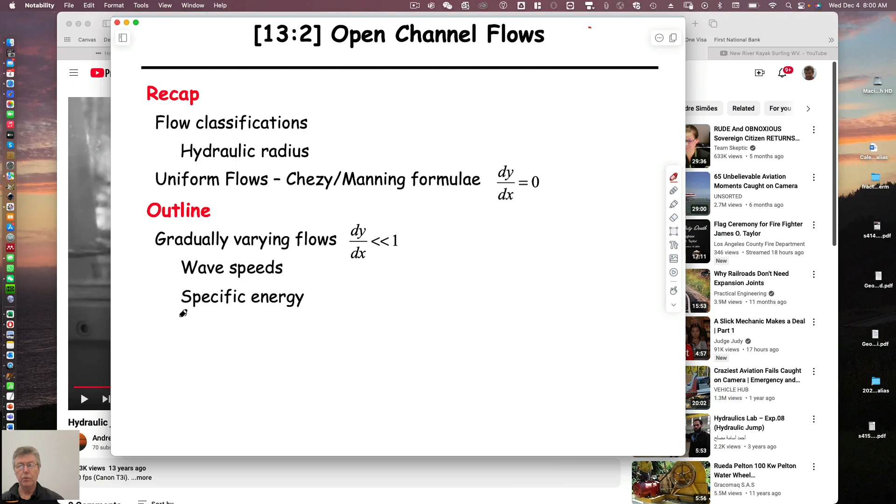All right, let's get rolling with this. We didn't quite finish off last time, right? So we were talking about uniform flows, and we were talking about the Manning formula, Chezy formula, Manning formula, where the depth doesn't change as you go downstream. We cut it short because we kind of ran out of time.

But the bottom line was, and all that you would need to know, is that we can define a volumetric flow rate or an average velocity coming out of a stream flow as a function of the slope of the bed. So the slope of the bed, if you recall, was just the height over the length. This would be the water on top of it, flowing downstream at some velocity v. And so S0 is just the gradient, the change in elevation divided by the length over which it occurs. And so gravity is driving the flow. And so this is the motive power, which is really, if you look at the energy equation, this would be the pump head.

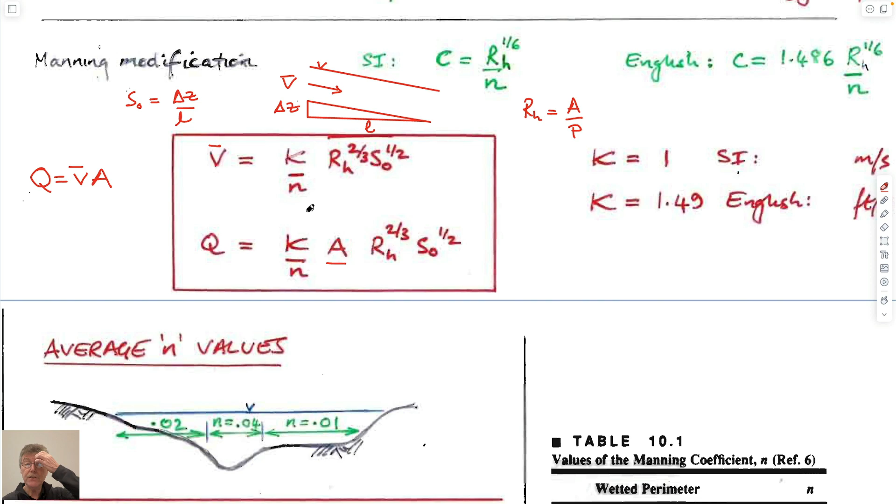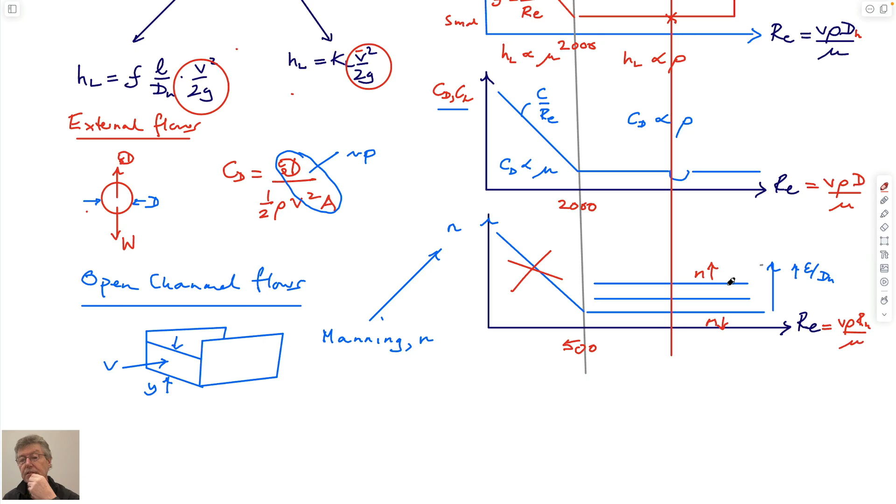This is the hydraulic radius. Hydraulic radius is equal to the area over the perimeter. And for Manning's coefficient, we rationalize the fact that it's a single value because if we look at Moody charts, we're always in this right-hand regime. So you can define a constant, which is a small number if it's smooth and a bigger number if it's a rough channel, and those numbers exist, which we'll look at in a second. And so it's just formulaic.

This coefficient depends on whether you're in SI units or English, and the units matter in this particular equation. Meters and seconds for this, or feet per second if you're in imperial or English units. Volumetric flow rate is just the average velocity times the cross-sectional area of flow.

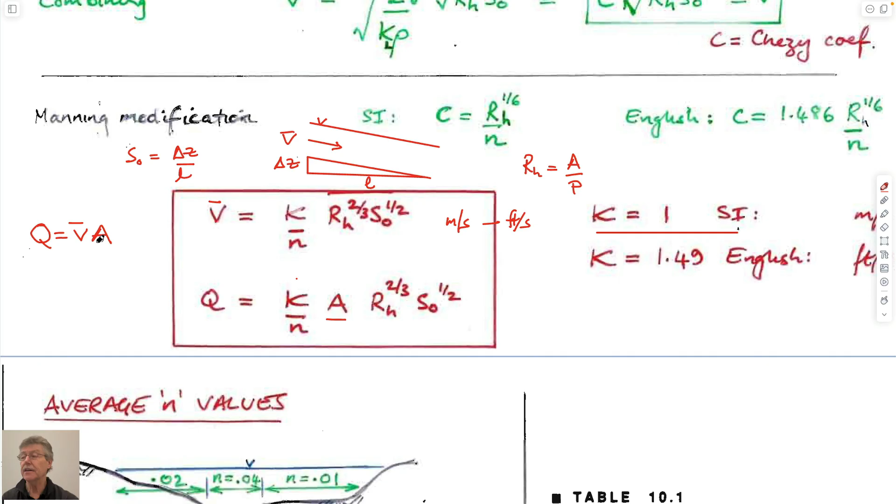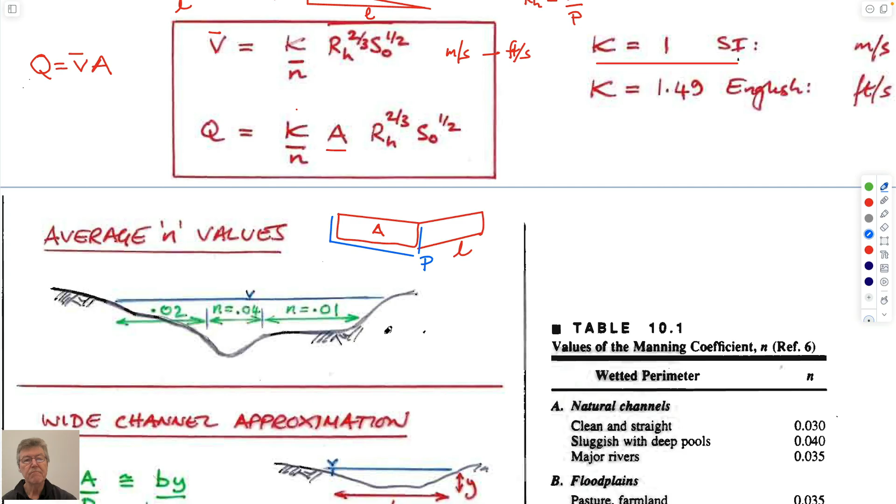And I guess we drew this in perspective so that, in terms of all our components, this is the length, this is the area, the perimeter is just this plus this plus this. And so it's easy to get this. And the slope would just be delta z, which would also be the slope of the surface as well, right? Because we said that the water slopes at the same amount. So this is just delta z, and this is also delta z.

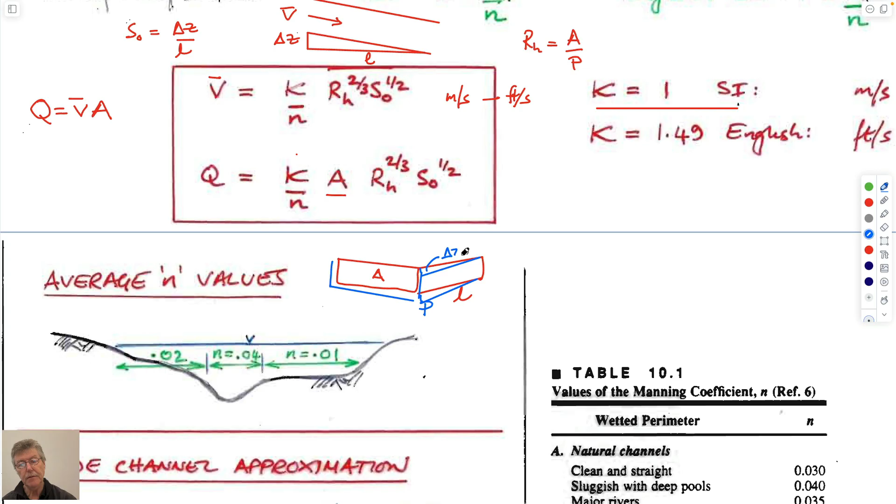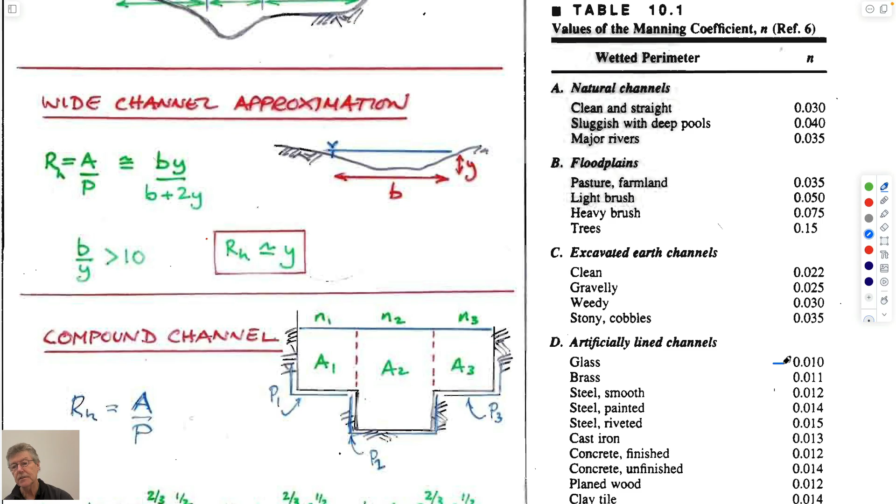And so if you have a section that you want to use, you can divide it into different parts depending on if you have a Manning coefficient, which I suppose we should talk about. They should be smaller for the smoother ones. So a glass channel, not many of those exist, I guess, but steel, if you have cast iron, or if you have a culvert, which is those corrugated steel ones, this is larger than a smooth one. So Manning's number increases as you get progressively rougher. So these are progressively rougher going down here. So this would be increasing epsilon over hydraulic radius, I guess, right? This would be increasing values of this as you go down here. Likewise for these. So you need to choose one that's appropriate for your system.

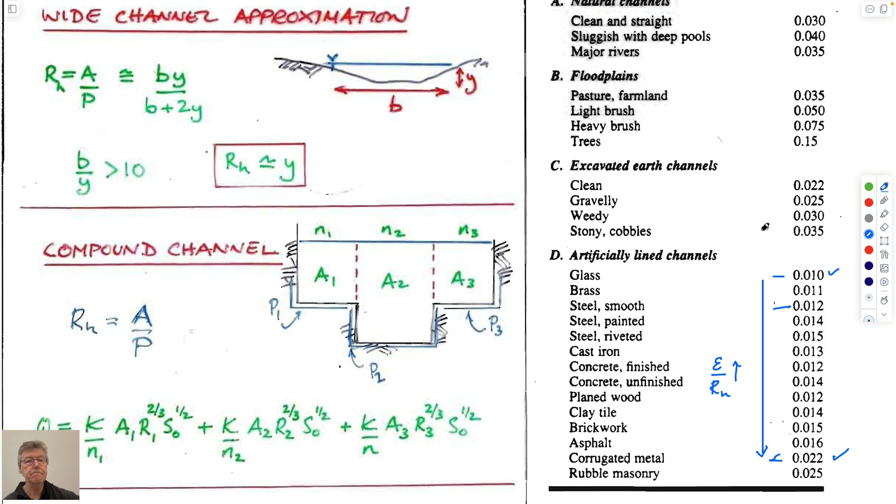You can use compound channels by having different Manning numbers. Perhaps on a floodplain you might be flowing through weeds, and this might be a real channel which is smoother. So this would be, I guess it's the opposite here, isn't it? This is larger in the middle than this. So perhaps it would be the other way around. Flowing through weeds here and flowing through a channel here, then you'd expect this Manning number to be smaller because it's smoother.

If you have a very wide channel and you define the hydraulic radius as the area, which is the width times the depth, and the perimeter would be the depth plus the width plus the depth, so b plus 2y. In the limit, if b is very wide, then this goes to just being the depth. The b's drop out on top and bottom. And so this ends up being an approximation.

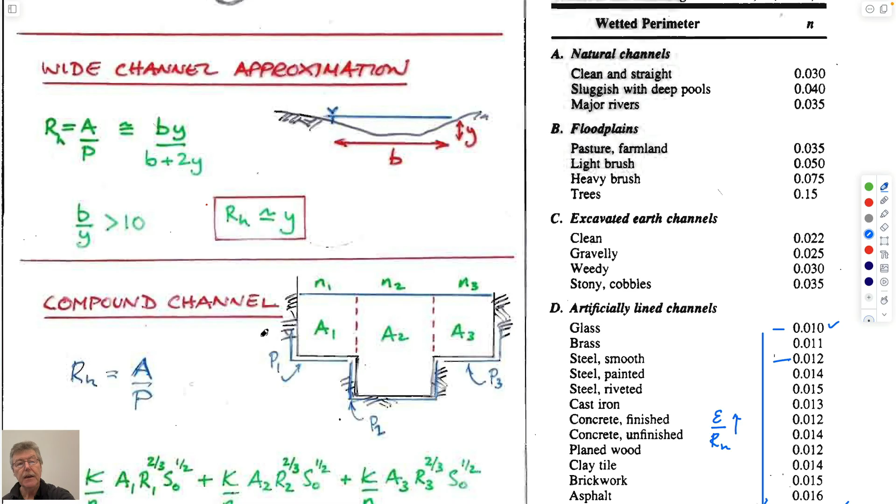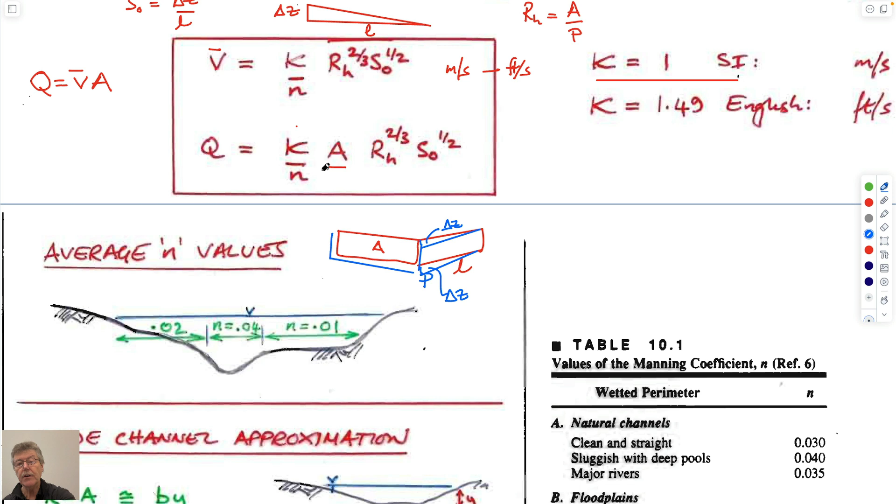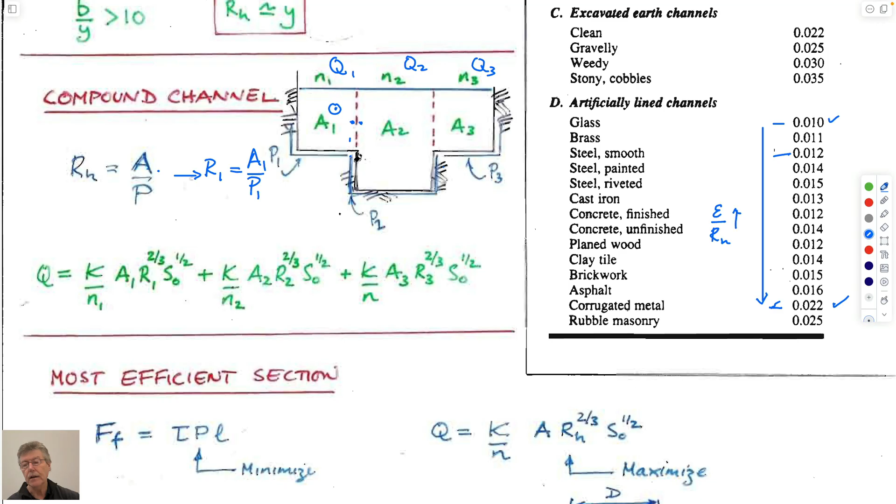And I guess the only thing to remember is that the areas of these would be the areas you see, but because you're dividing it up, the flow velocity on this side of the dashed line and this side of the dashed line is the same. So there's no drag on that boundary. And so the perimeter you use would only be for A1, it would be P1. It wouldn't include this part here. The perimeter for P2 would be this. It wouldn't include this or this. And the perimeter for P3 would be this, as opposed to the areas, which are just the areas. And so hydraulic radius 1 would just be equal to A1 over P1, where it's obviously just the wetted perimeter. So this is the wetted perimeter.

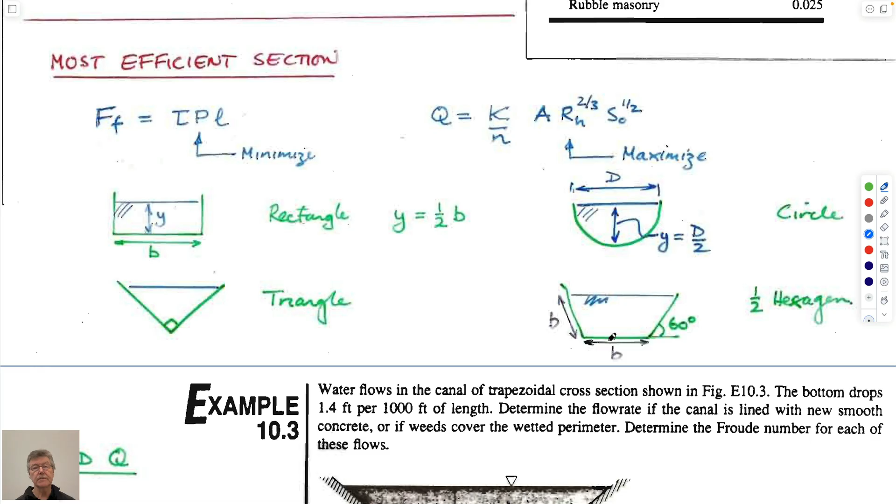And finally, I guess, there are sections that are the most efficient, that would carry the flow. And you could do that by maximizing the flow for any section. They're just standard results. The maximum flow section would be a rectangle where the depth is half the width. A triangle, which is a right angle triangle on its edge. A section of a circle which is filled to half, or a semicircle which is filled to full, or a half hexagon which has 60-degree sides and is the same length on each of the sides. Just standard results that come out. So that is that. And there's an example in here. Pretty easy to go through.

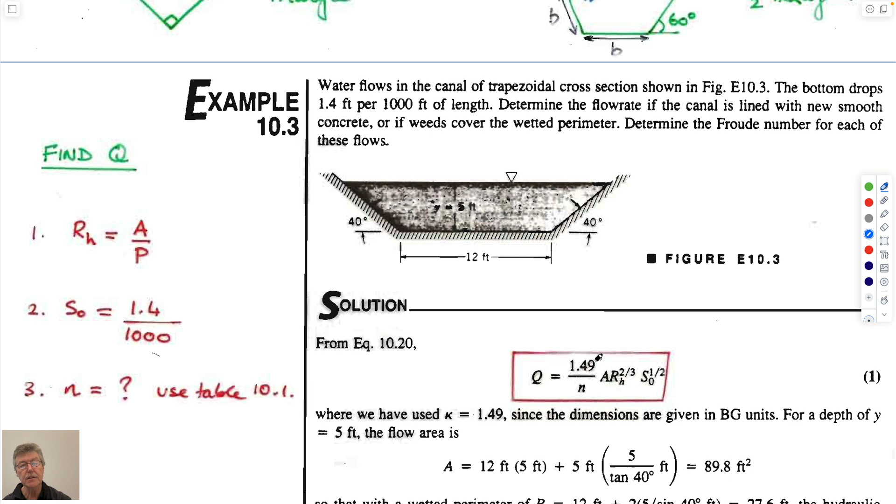Again, you just need to work out the dimensions for this, so you know the expression you need to use is this for flow rate. This is in English units, so instead of being 1, it's 1.49. A Manning coefficient, which you need for this particular lining, which is smooth concrete. Cross-sectional area, and a hydraulic radius to the power 2 over 3, and the slope of the channel. Slope is dimensionless. It's equal to 1.4 over 1,000, delta Z over the length of flow. The hydraulic radius is equal to the area over the perimeter.

I guess for this you'd need to do some work. Determine the flow rate for a lined canal. What do you know? You know 12 feet. Oh, you know a depth. So H equals 5. So I guess this is 40 degrees. This is 40 degrees. So W tan 40 equals H, which is equal to 5.

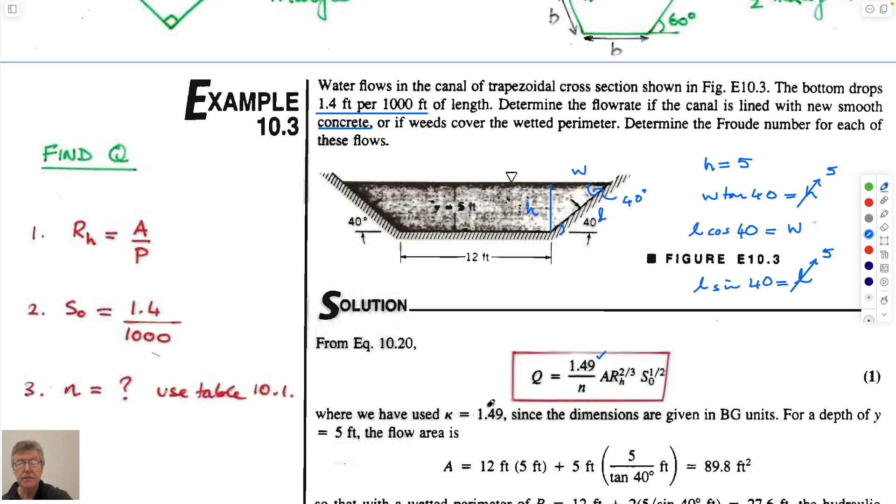You also need this for the wetted perimeter, right? So you need this length here. L cosine 40 is equal to W, and L sine 40 is equal to H. I guess you know H rather than W. And so those are the lengths you need. So the area, it's done here. The area is going to be 12 feet by 5 feet, which is this segment here.

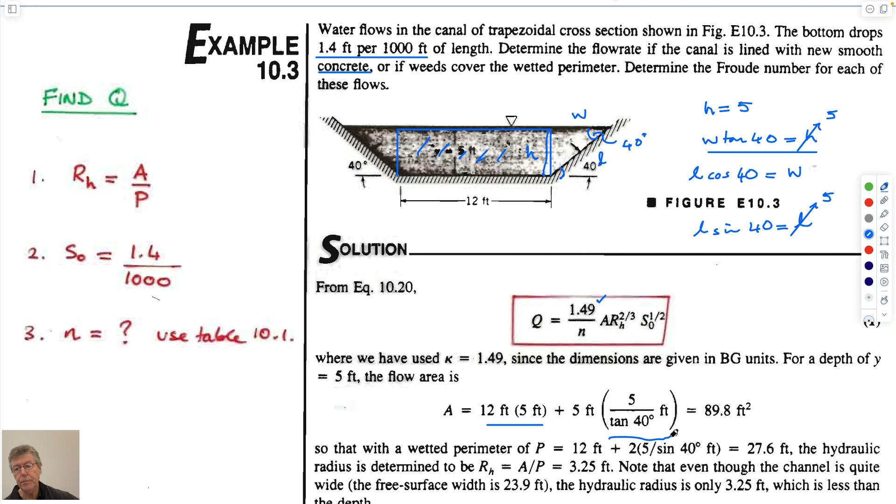And this is going to be 5 feet, height times half base. Half base is going to be the width divided by 2. The width divided by 2 is just this, rearranged. There's 2 of them, so it's half width times the height, but there's 2 of them because there's one at this end and this end, so put them together, they just end up being a rectangle. So this is the area of the other part. Add them together, you get this.

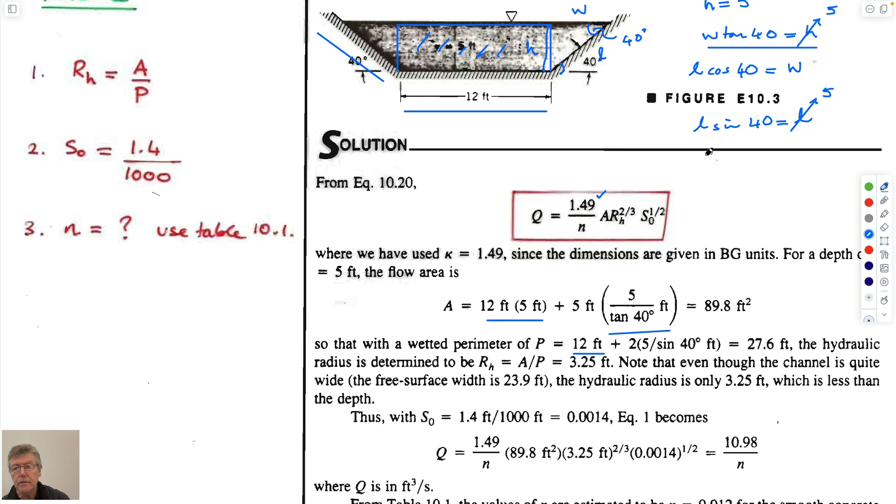The wetted perimeter, they do it, is equal to 12 feet plus what we've called L. So this is H, this is H, right? And so this is 5 over sine 40, and there's 2 of them, one at this side and one at this side. So you have the perimeter. The hydraulic radius is just the area divided by the perimeter, which is whatever it is.

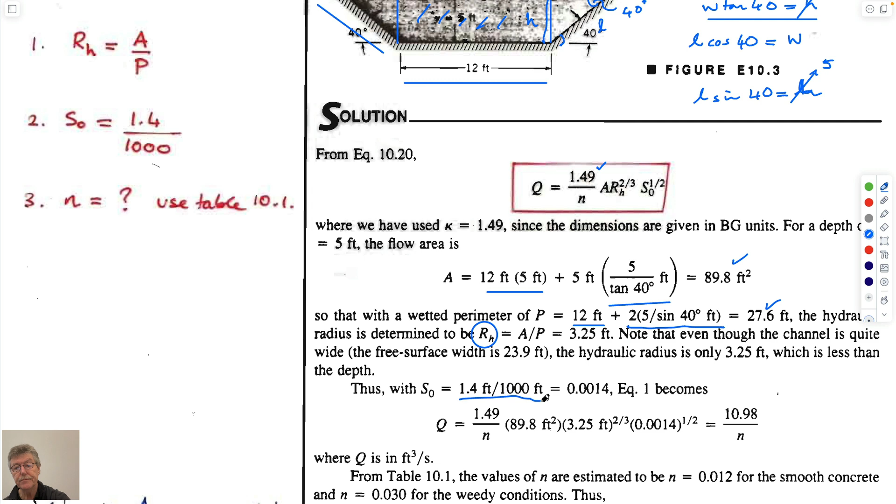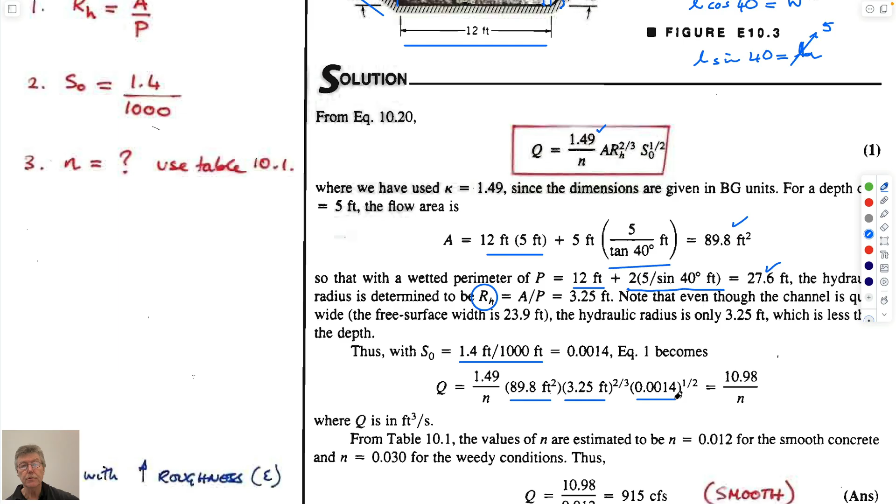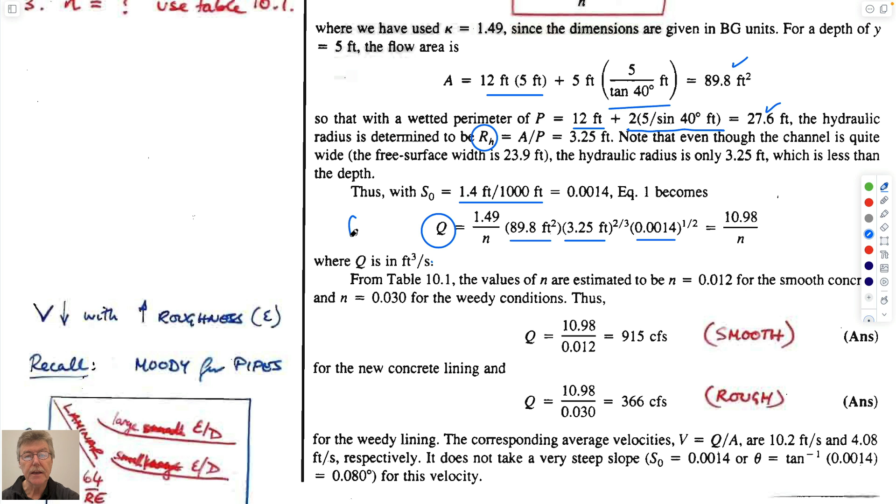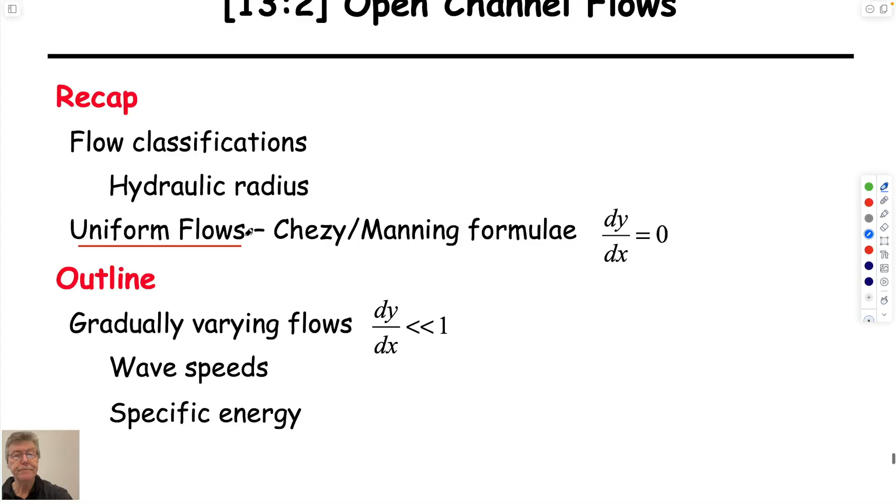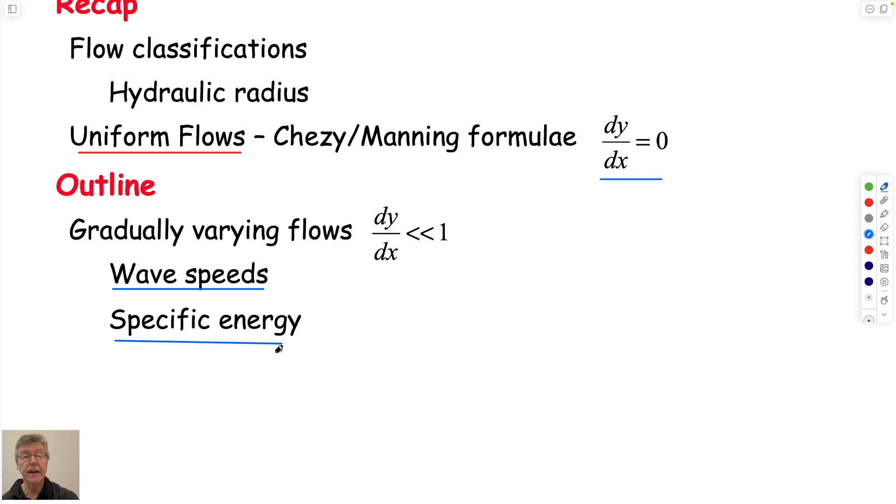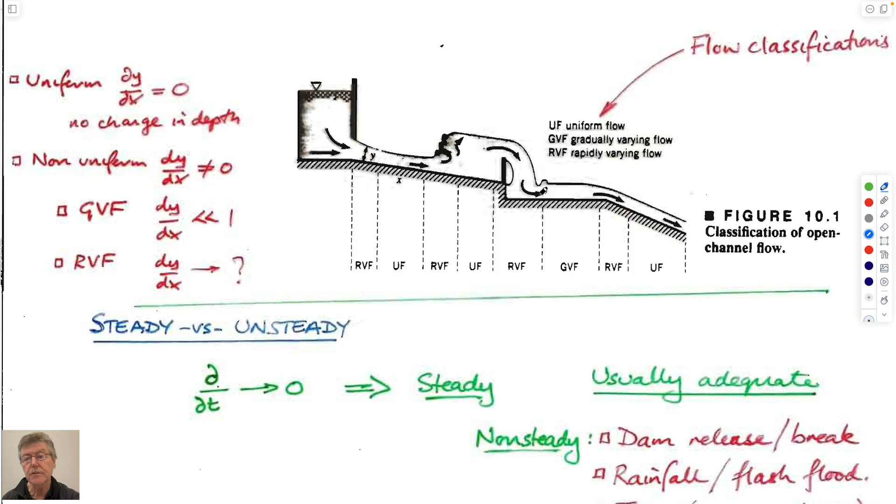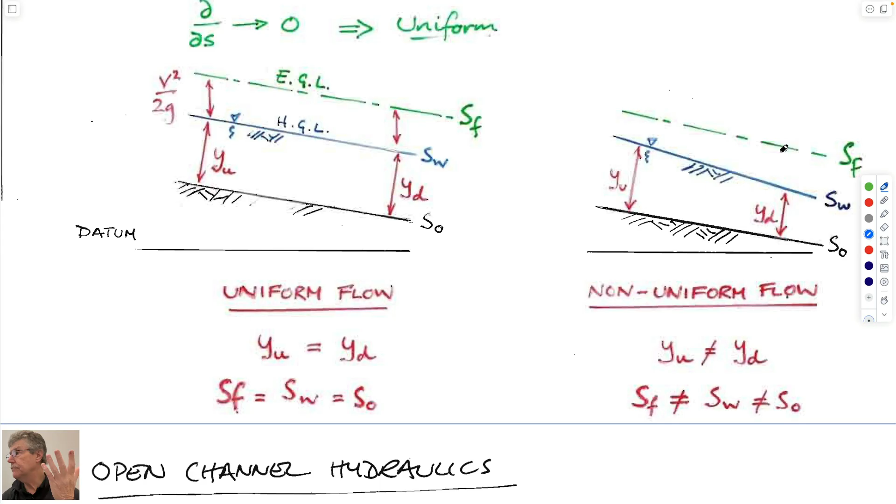So for gradually varying flows, which are when this is no longer the case, we need to talk about a couple of things. We talk about wave speeds. Perhaps we won't talk about that in great detail, and we can define things in terms of specific energy. Uniform flows are where upstream and downstream depths are the same. Gradually varying flows are where it goes from some depth upstream to some different depth downstream. And that means that instead of the hydraulic grade line being parallel to the bed, the slope S0, the slope of the water and the slope of the energy line can all be different to each other. And so we need to be able to deal with that.

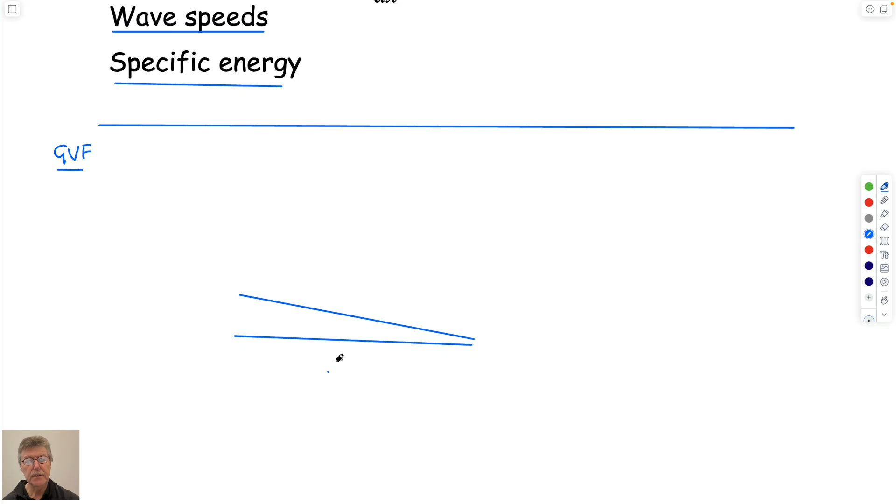So rather than going through it, perhaps I'll see if I can derive it cold. So for gradually varying flows, the geometry you have is something like this. Where this is a length, we're going to have a channel with a flow in it, and that channel is going to have something like this. And this is the horizontal. And so what we could define is a downstream and an upstream.

This should actually be tapered to there. And let's put some components on this. This is the bed. This is Bernoulli point 1. And this is Bernoulli point 2. This would be our datum.

I guess this would be Z1. This would be Z2. I didn't draw it very well, but then this would be delta Z. This would be the length between upstream and downstream. This would be our free surface.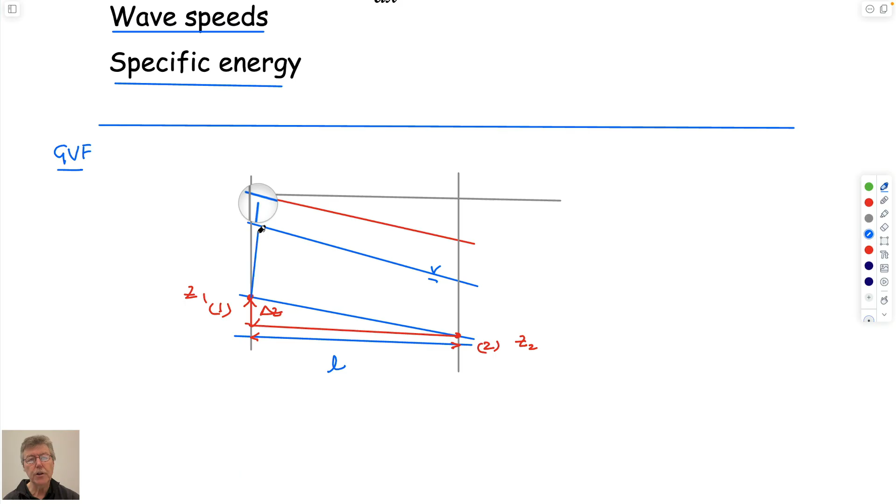If it's perpendicular to the bed, this would be Y, but it doesn't really matter whether we draw it vertically or perpendicular to the bed that's sloping, because the bed's sloping so shallowly. Let's draw it slightly askew. So this would be y1 and this would be y2. And this by definition would be v1 squared over 2g. And this would be v2 squared over 2g.

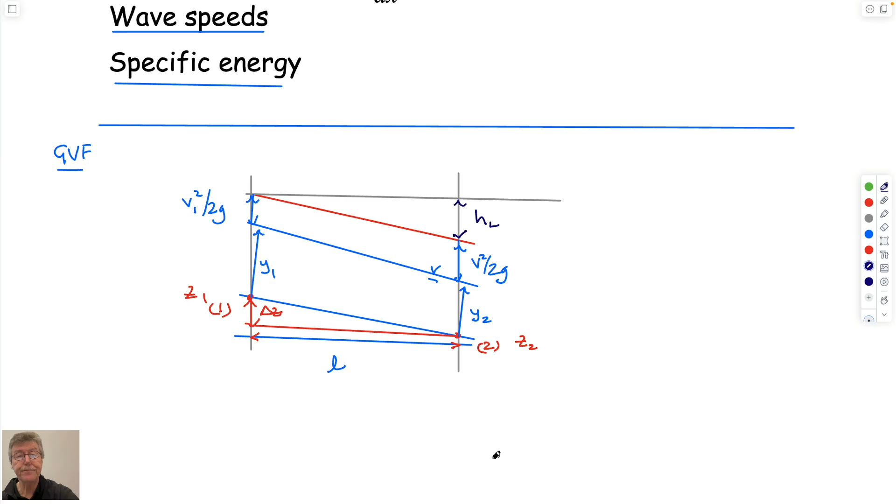And this other portion here would be called HL. All things we've seen before. And so the reason for writing it this way, this would be our solid bed that it's flowing on. This is the water surface. This would be what we've called before our hydraulic grade line and our energy grade line. So that's our geometry. We're not necessarily requiring that y1 and y2 are the same. And therefore, if that's the case, then v1 and v2 aren't necessarily the same either.

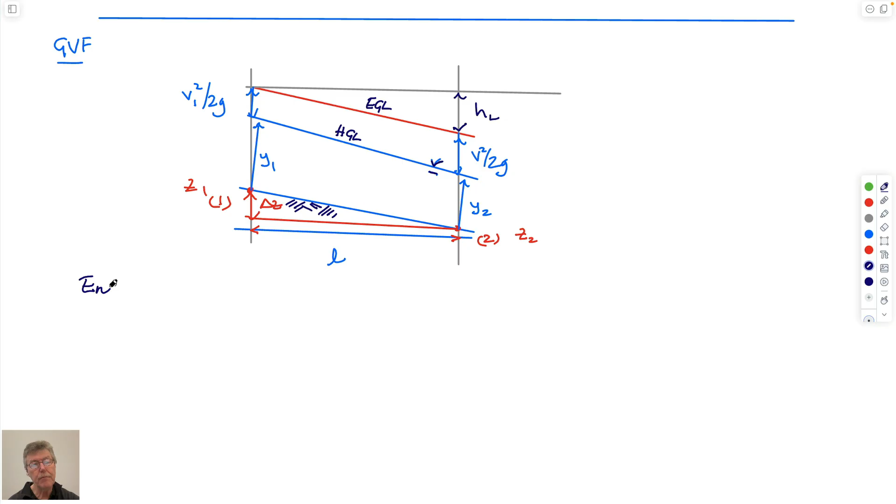And so we could write out our energy equation. And that is going to be Z1 plus P1 over gamma plus V1 squared over 2G. Let's put this in for fun, just to draw the analogy, plus HP equals Z2 plus P2 over gamma plus V2 squared over 2G plus HL. So nothing you haven't seen before. This looked kind of strange because we don't have a pump in here. But we said before that this is zero. What's driving flow, we said, is gravity. That's going from high potential here to low potential.

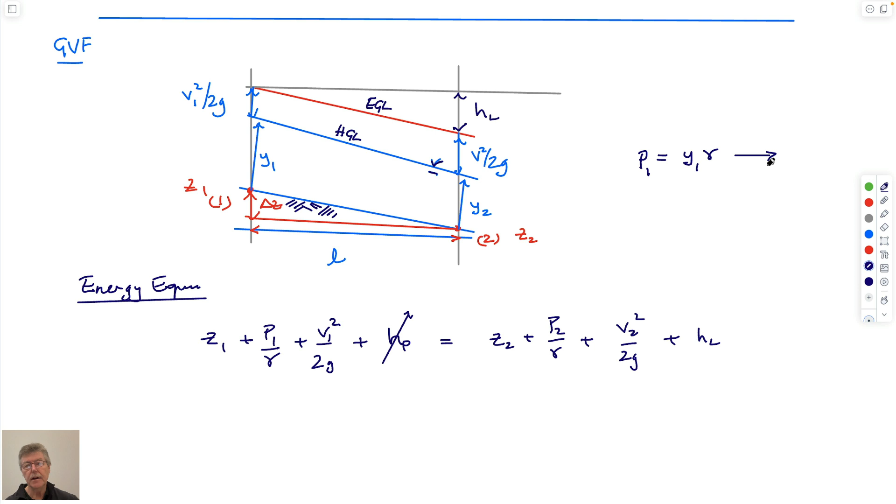So what we could also notice is that P1 is equal to Y1 gamma. And so also from that, I suppose, P1 over gamma is equal to Y1, just by rearranging this, which is useful because we have this here. We could substitute that here. So we could rearrange this as, so this is going to be Y1. This is going to be Y2. It's just saying that the pressure that acts at this point here is just the height of water above it. It doesn't matter that it's moving. It's just like a static swimming pool.

And we could take these two off to the other side. So let's write this as Y1 plus V1 squared over 2G is equal to Z2 minus Z1 plus HL. We defined before that the head loss slope, SF I think it was, SF is equal to head loss divided by the length over which it occurs. And also S0, which is the slope of the bottom bed, was equal to delta Z over L.

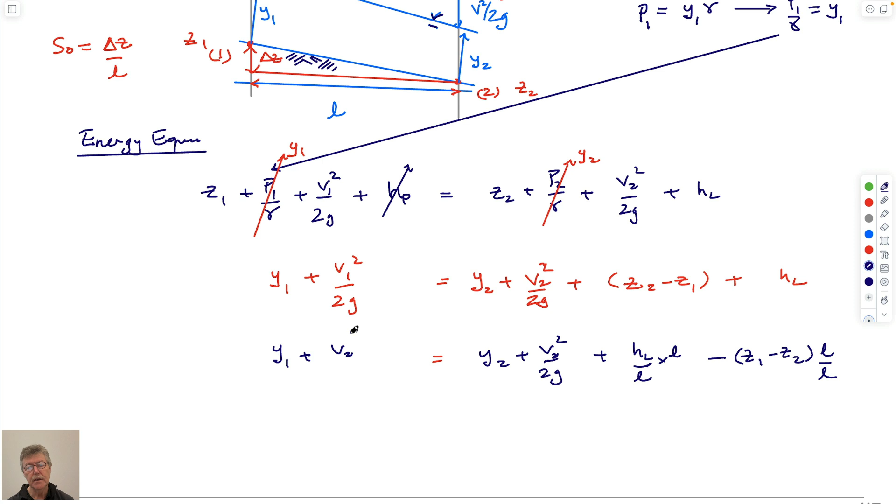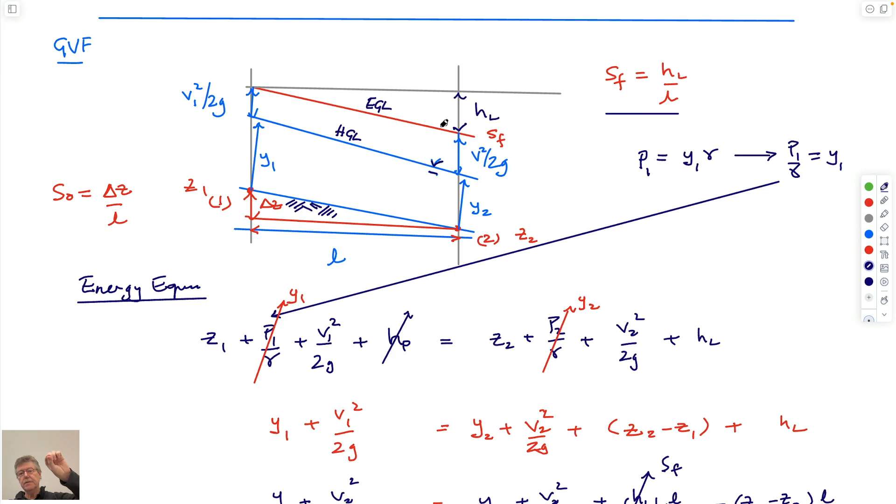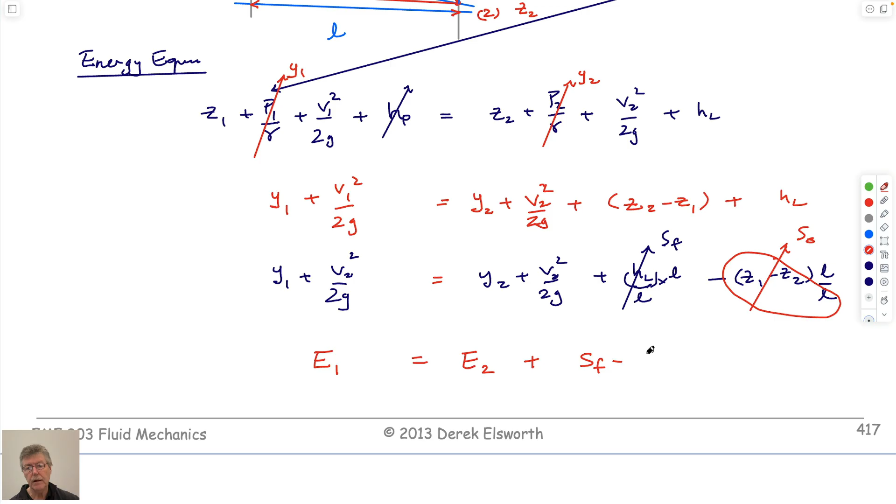Y1 plus, believe me, this is much easier than the 10 pages of derivation that are written in the notes. And so we know that these terms here are what we've called SF, the slope of the free surface. So it goes from this to this drop as it goes downstream. That slope is just SF. And I suppose this is also equal to S0. So finally, we call this term the specific energy upstream, which is equal to the specific energy downstream plus (SF minus S0) times L. That's it. And so that's our energy equation.

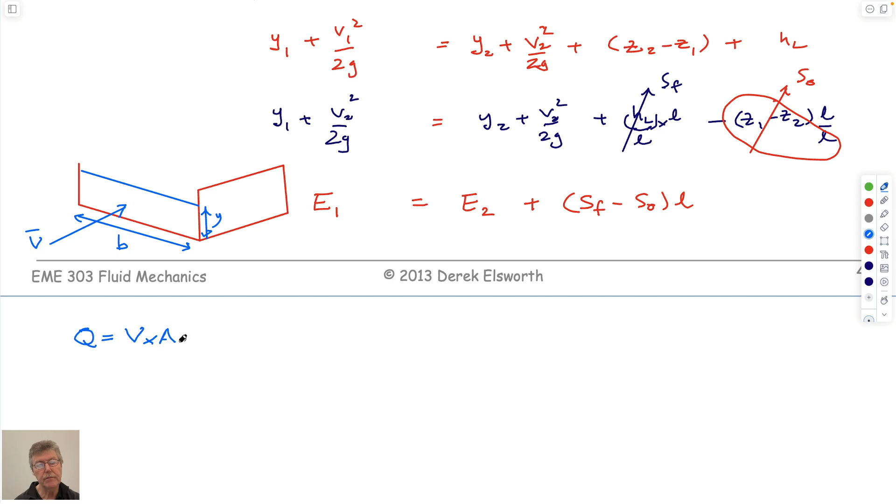And so the one last thing we'd like to do is that if we look at our section as we go across, this is our cross-sectional area of flow as we go downstream. We know that if we have water across here, and the depth of this is y, as we've just said, and the width of this is b, and we have water going down at some velocity v average, then we can write that volumetric flow rate is equal to velocity times area, which is equal to average velocity times b times y.

But what we might want to do is divide this up so that we have a section here which is flowing at some flow rate which we'll call lowercase q. So q is equal to volumetric flow rate over b, right? This is just a unit width. This is one meter, if you like. And so we know that we have a width of a channel. We know that its depth can change because it can choose its depth to be shallow and fast or deep and slow. And so we might want this to be a variable. So if we include this down here, then this is average velocity times b times y divided by b.

These cancel out, and we have that q is equal to v times y. And so alternatively, we could write this as velocity is equal to q over y. The use of that is that we could substitute this into here. So if we write that expression out in long form, it's going to be y1 plus q squared over 2g y squared. It'll be y1 because it's at point 1.

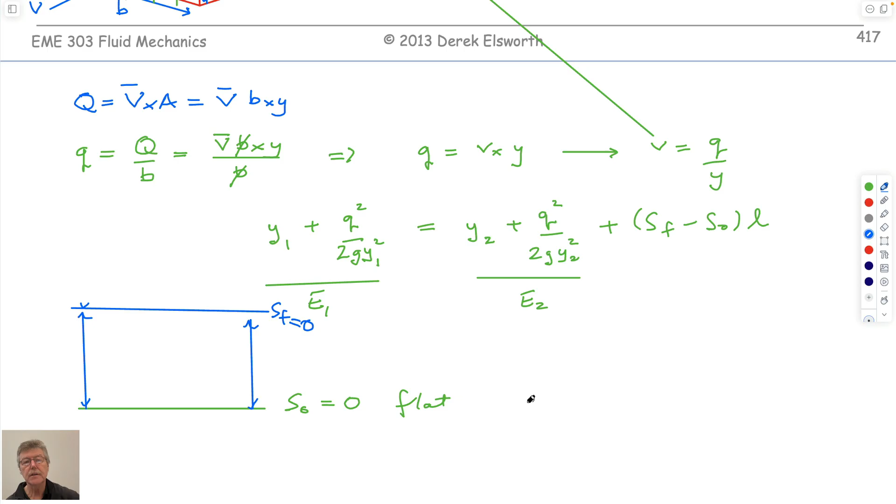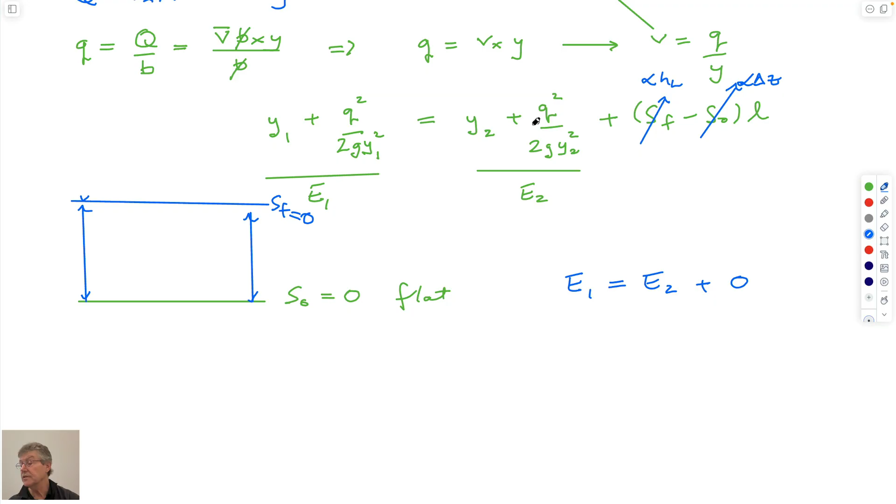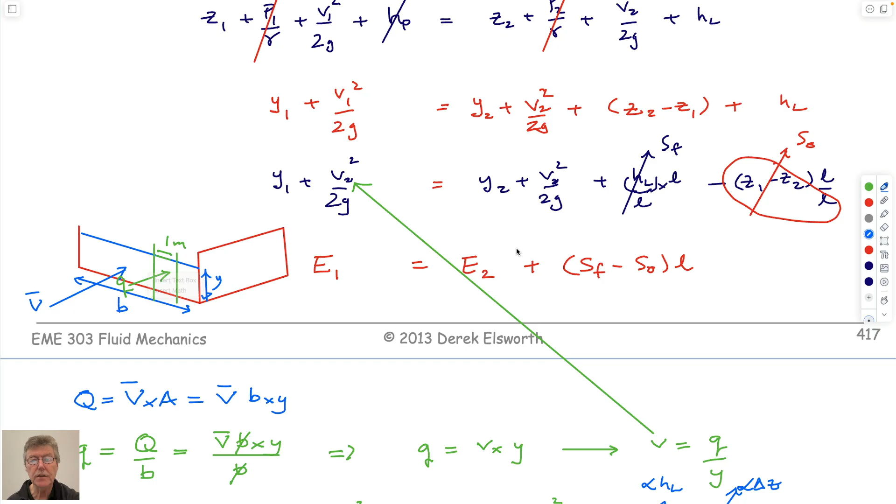So either both of these are 0, or the components of these are 0. In other words, if the slope of the base is this, and the flow above it is parallel to that, then these would also be 0, and this term would drop out. We'd just be left with E upstream is equal to E downstream plus 0. Either if these are individually flat, or if they're individually the same slope because they cancel out. It's basically saying that the dissipation of energy in the system is exactly the same as the rate at which gravity is driving flow. This is gravity driving flow, so this is the same as, or proportional to, our delta Z term, and this is the same as our head loss term, just to remember. And so our utility for doing this is that in this equation, Q, whether it's flowing upstream at a deep depth or flowing downstream at a shallow depth, is always the same. Continuity requires the same volumetric flow rate going through a unit width of the channel, unless the channel's slimming.

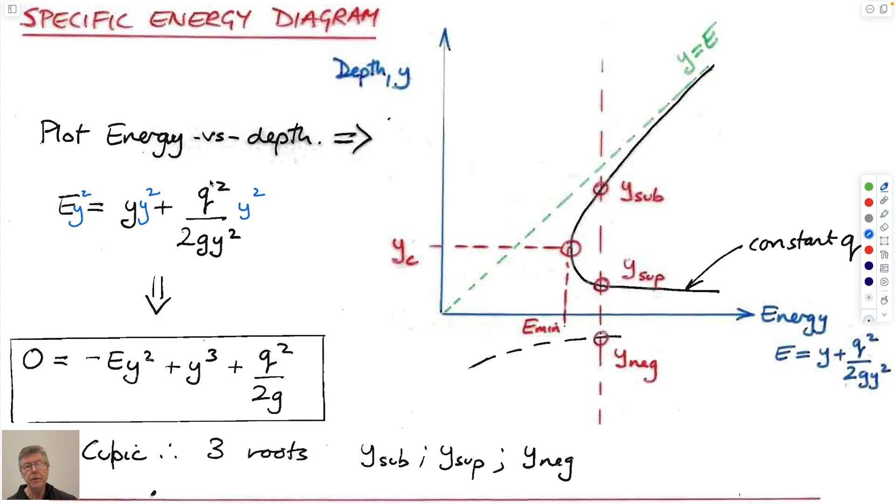And so what we can do is use that to understand what's going on. So we've gone through this, we haven't done this, we'll come back to that. So this is what we did. What we can do is look at how energy changes as we go downstream. This is what we've defined already as our energy. It's the depth of flow, the volumetric flow rate per unit width, and the depth of flow, either upstream or downstream. If you take this expression and multiply both sides by y squared, you end up with the cubic equation, which defines that you have 3 potential roots. So what you could do, in plotting the value of the energy against the depth of flow, is choose a value of volumetric flow per unit width, Q.

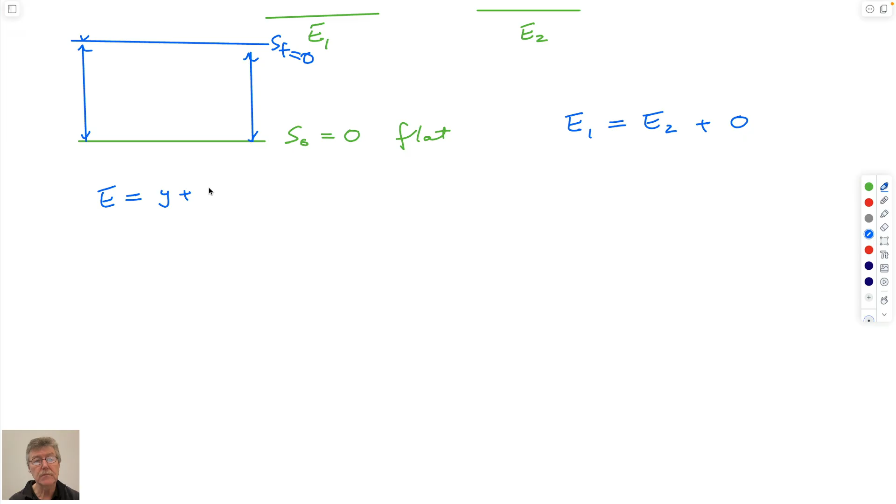So if you choose, why don't I draw it? We have E is equal to y plus Q squared over, is it 2g y squared? Yes. So choose Q equals 5 meters. It'll be meters squared per second, right? So 5 cubic meters per second, but it's only 1 meter width, so it'd be meters squared per second. And then cycle for y equals 0 to infinity.

And if you do that, from what we just saw drawn, if we have a diagram that plots E versus depth, we end up with a diagram that looks like this. The diagonal, which is 1 to 1, which is y equals E, and for y equals 0, you'd end up with a number here. Y equals 0 would actually give you infinity, I think, but a small number would give you this. You'd end up with a plot that looked like this, like a nose. Always tapering downwards, still tapering, so it's parallel to this line here.

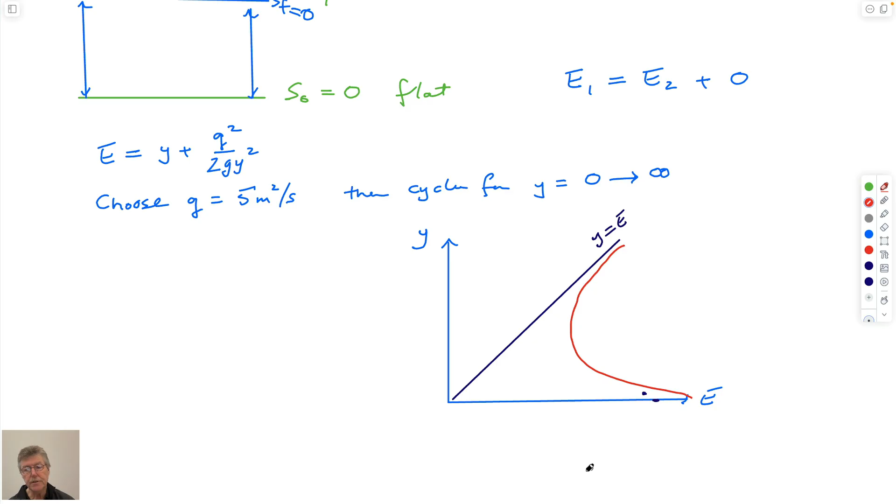Yeah, that's good enough. And it also has a component for negative. So if you take a specific value of energy, E equals something, then you have three roots. You're solving a cubic equation. One's a negative depth, which makes no sense, but two are positive depths.

And this red line ultimately asymptotes to this y equals E line, because if you take y as a big number, y squared in the denominator makes this term go to 0, and so you just have E equals y. So in the limit, you'd expect it to do this. And so the physical interpretation is that for a given energy state in your stream being driven as flowing, it could be flowing at deep depth but very slowly, or at shallow depth very quickly. And so physically what this looks like would be

flowing along a flat channel. I want that to be blue. There we go. And it could be flowing either quickly or slowly. And the reason it might be doing that is because you have a sluice. And so this is a gate that you put in the middle of the flow. This doesn't exist.

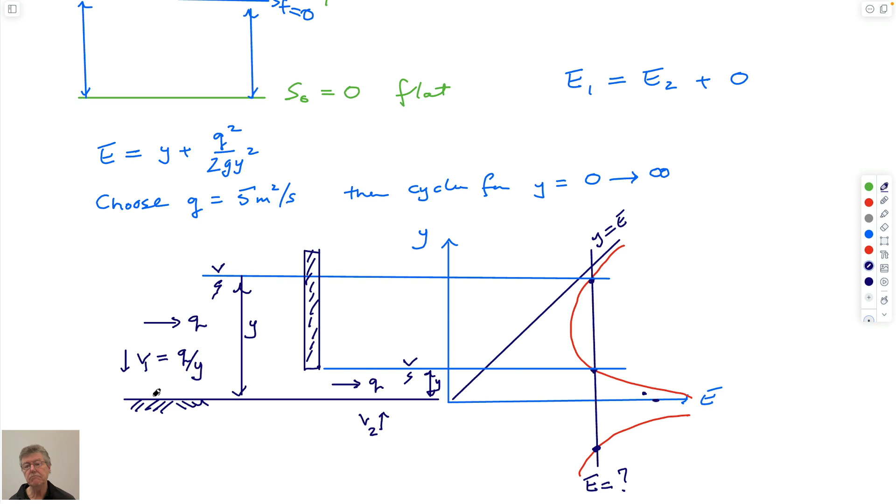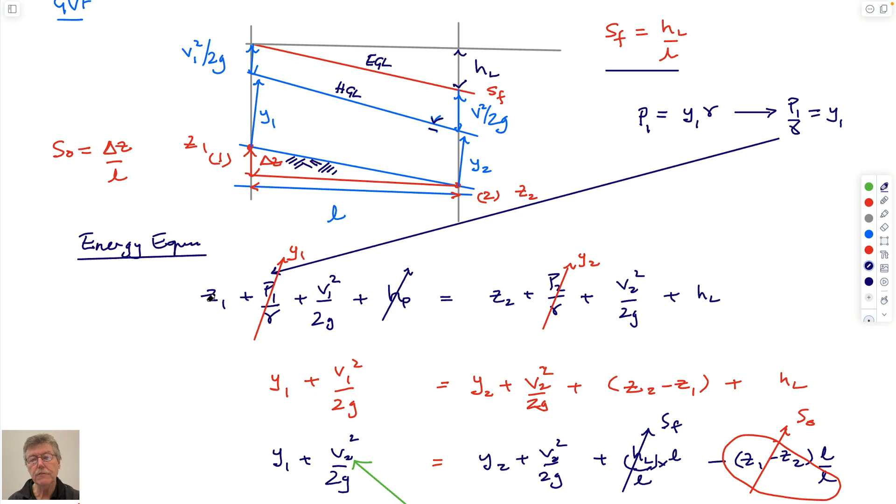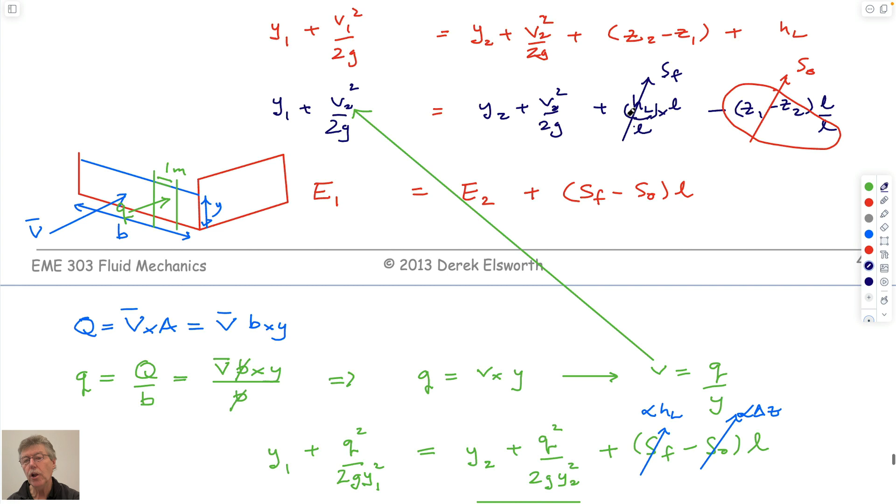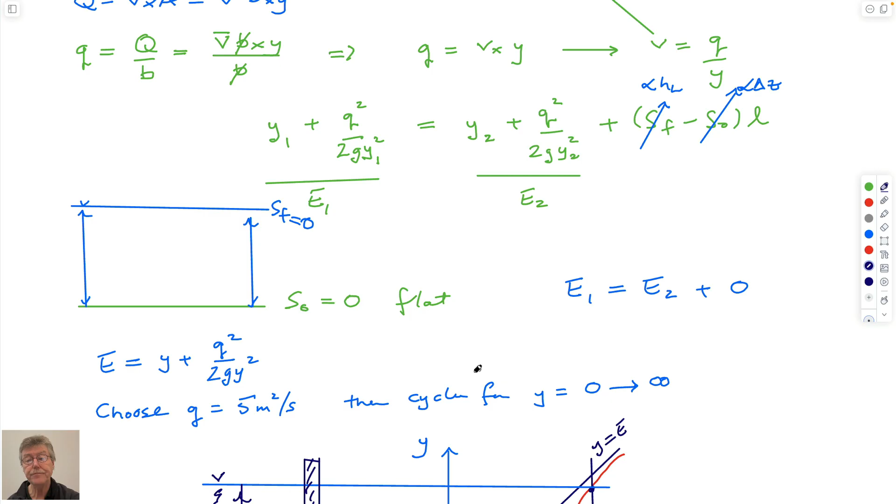So to recap, all we've done is we've taken the Bernoulli equation with the energy terms in it, which are head loss and flow driven by gravity. We rearranged it to get the gravity term that's driving flow on the right-hand side, and it's given by the slope of the bed of the flow, which is this. The losses are given by the gradient of the free surface, and we can define that by these two energy terms, upstream and downstream. If energy is constant upstream, by making these loss terms and the driving flow term 0, which we could rationalize either by making them both 0 or making them equal to each other, then we have E1 equals E2. And E1 equals E2 is basically this. This is a constant value of energy. We've plotted for Q equals 5 meters squared per second a single curve.

If we plotted a value for, can't remember, Q equals, can't remember if it's bigger or smaller, a different value inside there, it would look different. But physically what that means is that if you can make the flow be deep, then it has to go at relatively small velocity. Or if you can make the flow be shallow, it has to go at relatively fast velocity. And it can take either of these two states because both of them are admissible. And so that's really what the curve represents. And so that's it. That's for gradually varying flows: you could have two possible flows because the free surface is a wild card, if you like, and it can be in either of those two configurations.

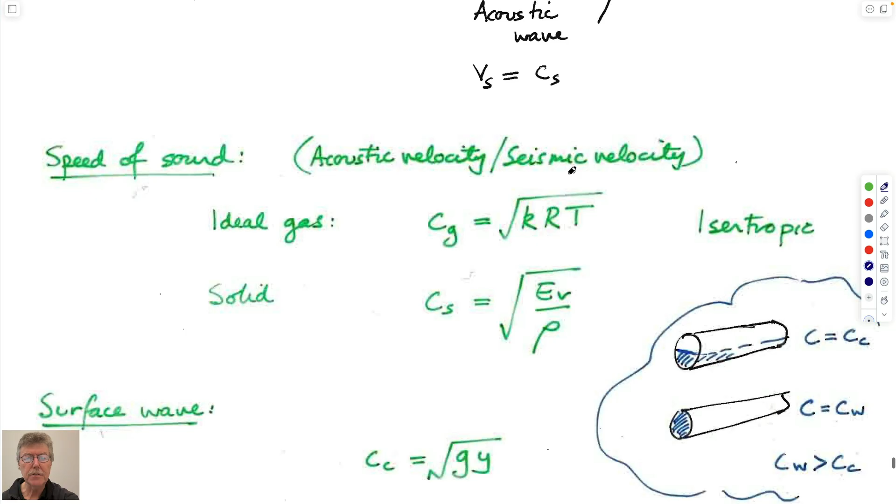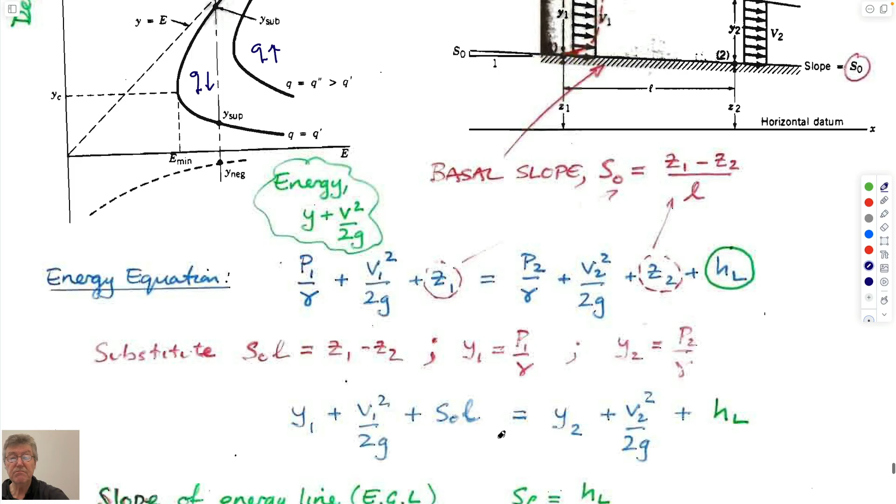So I'm not sure what else we have here. I won't talk about that. So this is it. Yeah, so Q1, this is larger. So Q is larger here, and Q is smaller here, different flow rates as we drew it. So this is the same derivation. It's all written there.

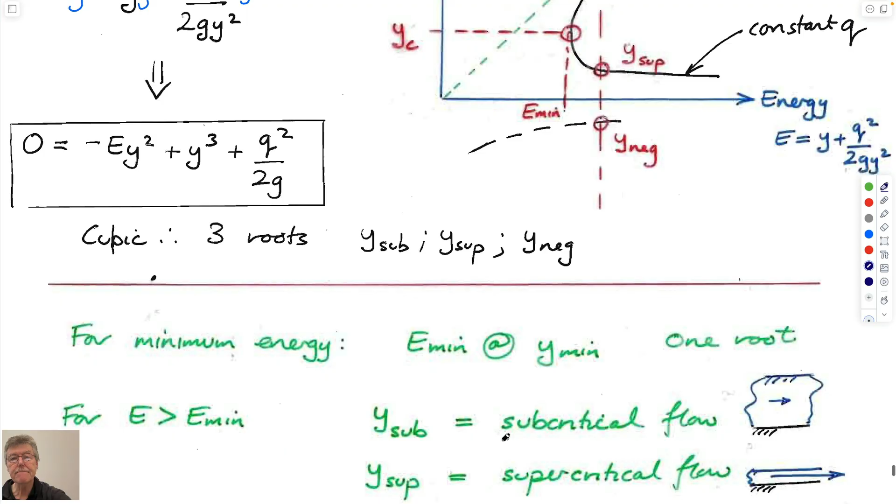I guess the other thing that might be worthwhile doing is that these points on our curve are actually conditioned by our Froude number. And so this very tip of the nose, the minimum energy, so this would be the minimum energy here. I'm kind of running out of colors. This would be for a Froude number of 1, which is equal to the flow velocity divided by the square root of gravity times the depth.

The definition of Froude number is the velocity of flow divided by the celerity of the wave. Remember when we talked about waves, the tsunami wave velocity was equal to the square root of g times depth in the ocean. It turned out to be something like 100 meters a second for Japan when we talked about that. And so this is the velocity at which information travels upstream. And so when they're exactly equal, it happens to be at the minimum energy.

If you look at everywhere relative to this, everywhere on this curve above this the Froude number is less than 1. And everywhere below this, the Froude number is greater than 1. And this is what we refer to as subcritical.

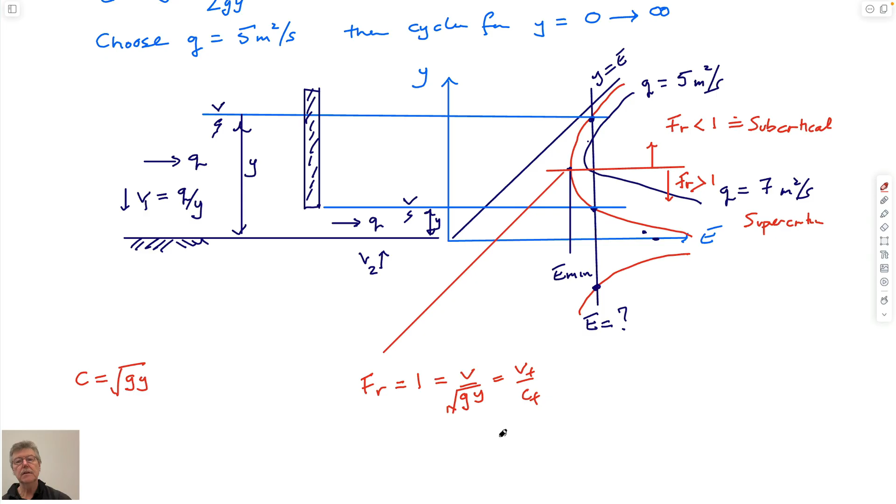It's subcritical. It's kind of a lazy flow that's going at slow velocity. And if you're looking at the numbers below this, then they're always greater than 1. In terms, it's traveling faster than the wave speed, which would carry information upstream. And so that, again, comes back to this figure, which we've suggested here.

And what it means, this figure here, is that this is the flow velocity at the critical velocity, happens to be called at critical depth yc, and if the Froude number is less than 1, then it's subcritical. It means it's deep and slow. If it's greater than 1, then it's shallow and fast, and they represent those two parts on the curve.

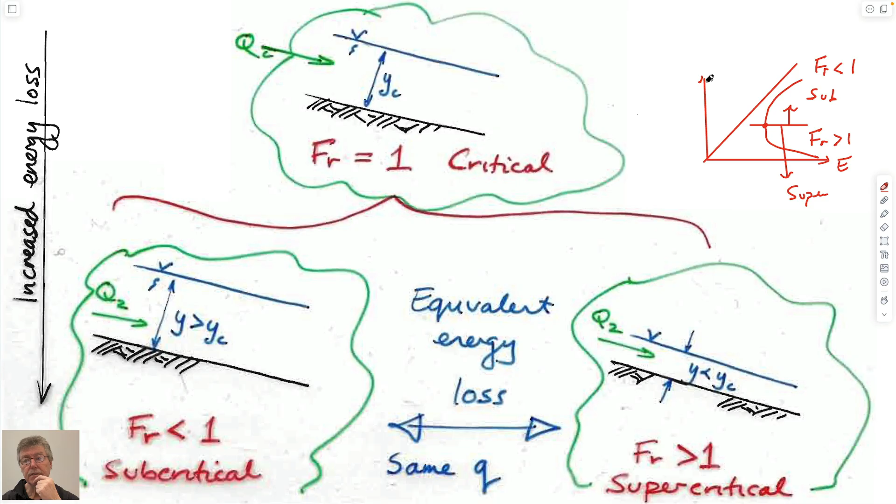So this is sub, and the Froude number is less than 1, Fr greater than 1, and super. And this is energy, and this is depth. So that's an explanation of it. The other explanation of it, blah, blah, blah.

The other explanation of the Froude number is given by, if you think about the rate at which a wave travels. The velocity is equal to the length traveled over time. And so length is equal to velocity times time. If you imagine dropping a pebble in the water, then the wave train would look like this as it goes radially outwards.

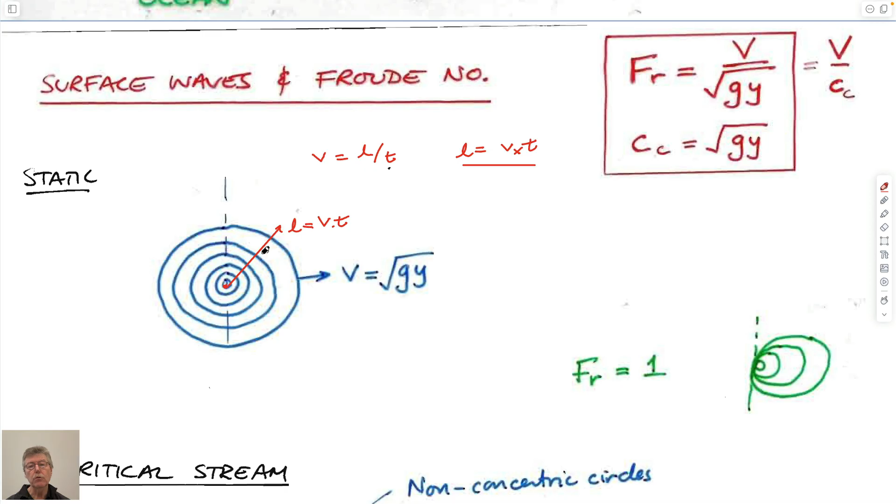But if instead of dropping a pebble, you think about tapping the water surface every second and looking at the waves which would come out, then if you're tapping it in the same spot in a stagnant bucket, they'd all be concentric, right? And the length that it's traveled would be equal to the velocity times time, which is up here. The velocity is going to be the velocity of the celerity wave, so it depends on the depth and what planet you're on. And if you're not moving, it will always look like these concentric rings.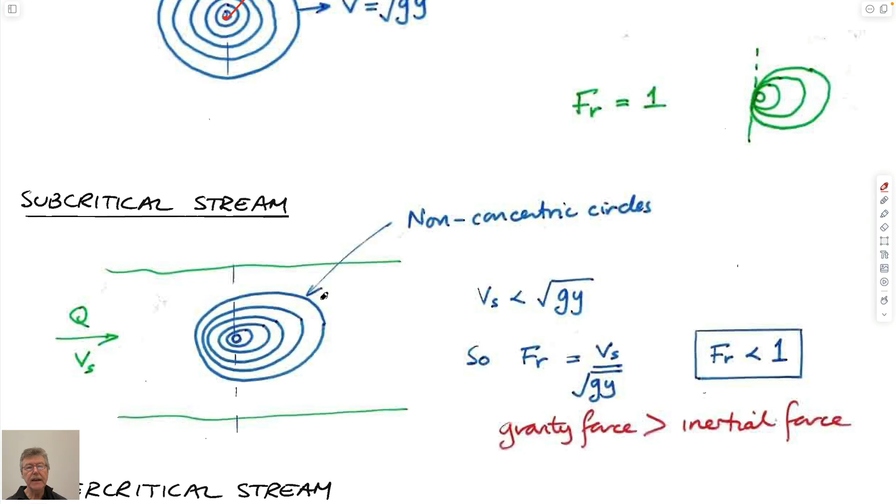If you're tapping in the same place and the water's moving past you, then if you looked at the one that you did 10 seconds ago, and 9 seconds ago, and 8 seconds ago, and 7 seconds ago, no longer would they be concentric, but they would be skewed to the downstream. If you think about this, when the wave speed is exactly the same as the velocity of the flow, then the rings would look like this.

It's like a plane going through at the speed of sound, the Mach cone, right? So the Mach cone is because the plane was here at this time. The energy is trying to get away from the tip. It's going at the speed of sound. It gets this far away in the time that it takes for the tip of the plane to go to this point. From this point, the sound wave travels this far, and then the plane has to get to this point. So the Mach cone is just the locus of all the points where all the energy that's been traveling away from the tip of the plane has got as it moves downstream.

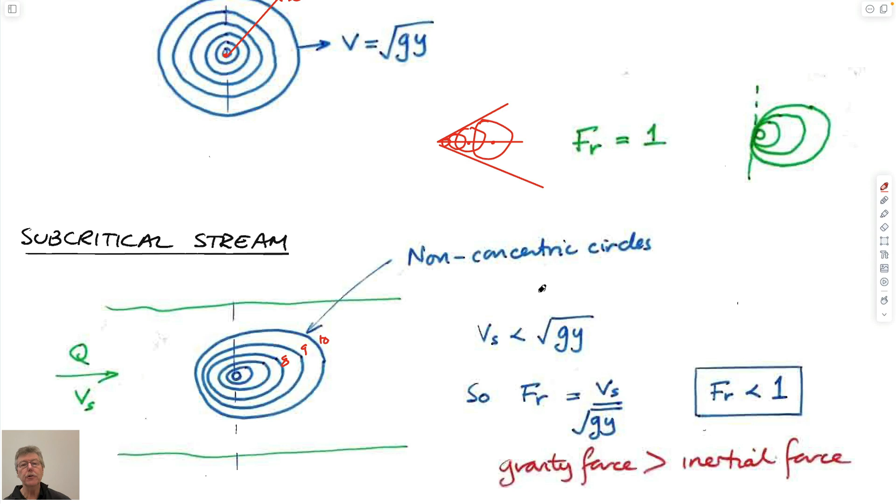The Froude number is kind of the same as that, except you're static and the water's going past you. So this is what the ripples would look like at a Froude number equal to 1. And so what it means is that if you're drowning downstream, and the only way you have to communicate upstream is by slapping the water, and you're supercritical, then that information will never arrive if your savior is sitting at the water looking for a wave to come, because it can't go up against the current. If you're here, you'd be just fine. They'd be able to see it, but you can't.

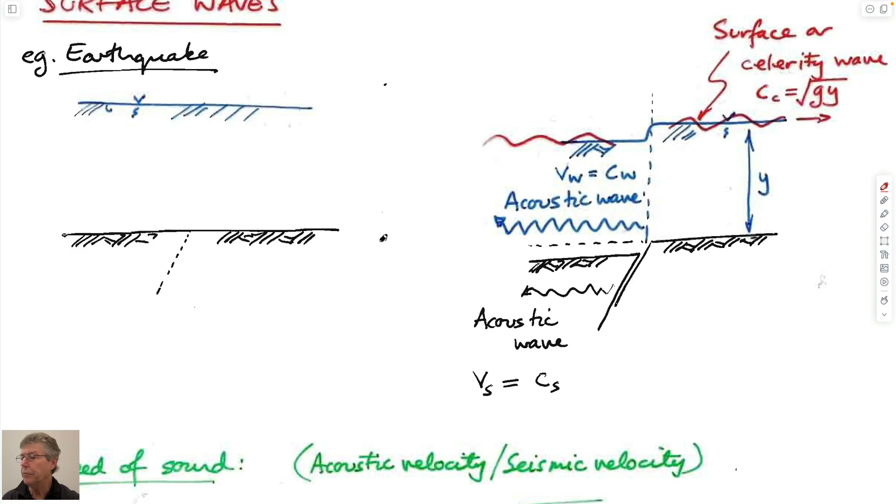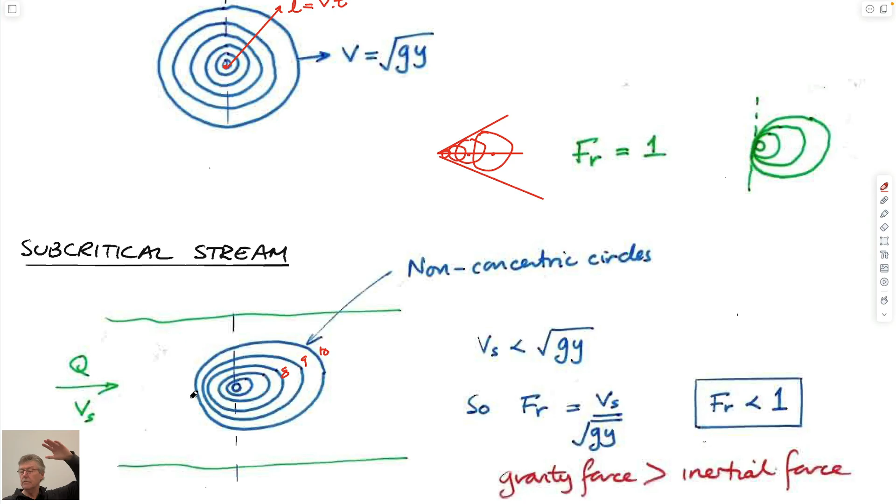And so what it means is no information is able to get upstream if the flow is faster than wave speed. So if it's subcritical, then information can go upstream. This would be in the tall part above the weir, and information can come. If you're present downstream of that, then 10 seconds ago, you'd make this ring, and it would be carried downstream. 8 seconds, 7 seconds, right there.

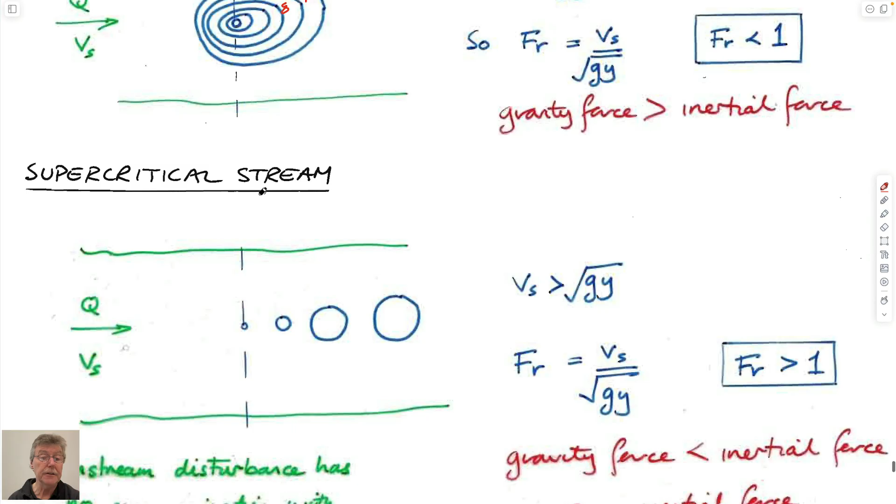And it's all related to the... So it seems esoteric that we're talking about wave speeds. Why would we care? They're important for these open channel flows because they essentially tell you if you're able to send information upstream or not, which is how it knows how to organize itself in a flow. And so I think the only parts you need to know are the bits we've talked about.

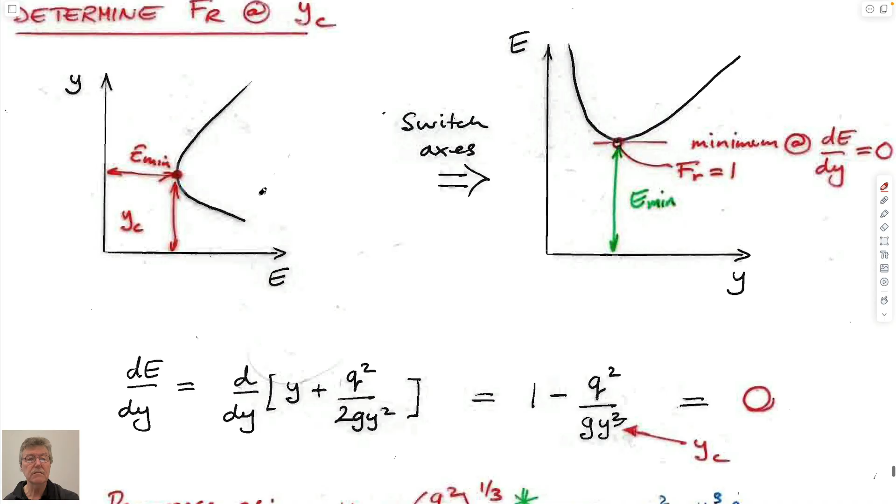One more point, I guess. If you take this flow that we talked about, we know that this point here is a Froude number equal to 1, critical flow. Critical flow occurs at a critical depth, which is YC, and at the minimum energy in the system. If we wanted to determine what the coordinates of that point are, we could be clever and just look for where this minimum occurs.

The easiest way to do it is, instead of having this plot here, you just flip it the other way. If you flip it so E is going upwards and Y is horizontal, then you look for the minimum energy in the system. We know that the minimum energy is where dE/dy is equal to 0, by definition, right? The gradient at this point here is flat, so dE/dy is 0.

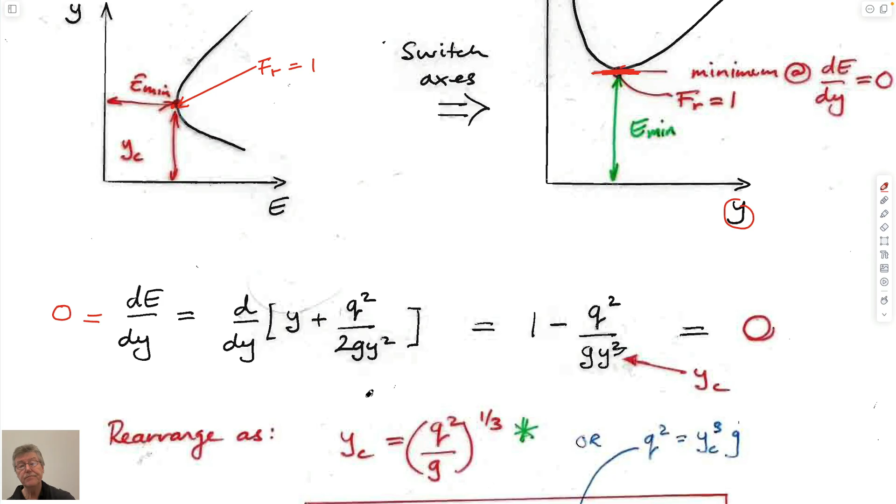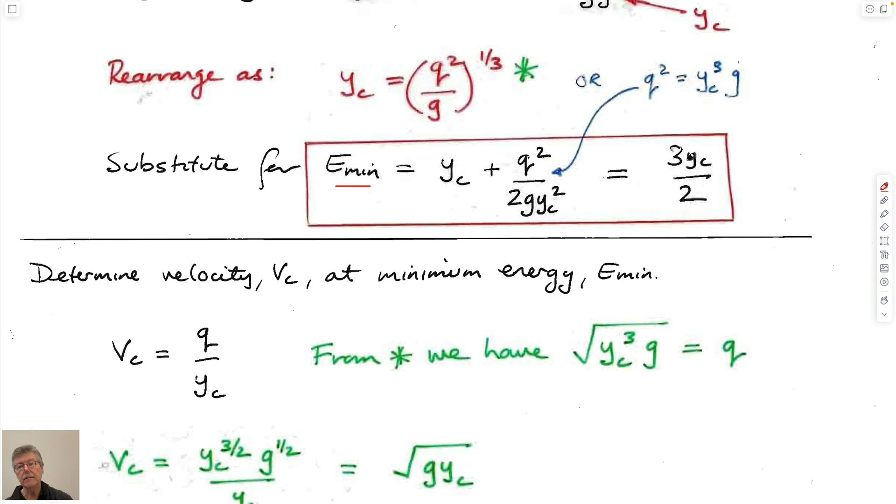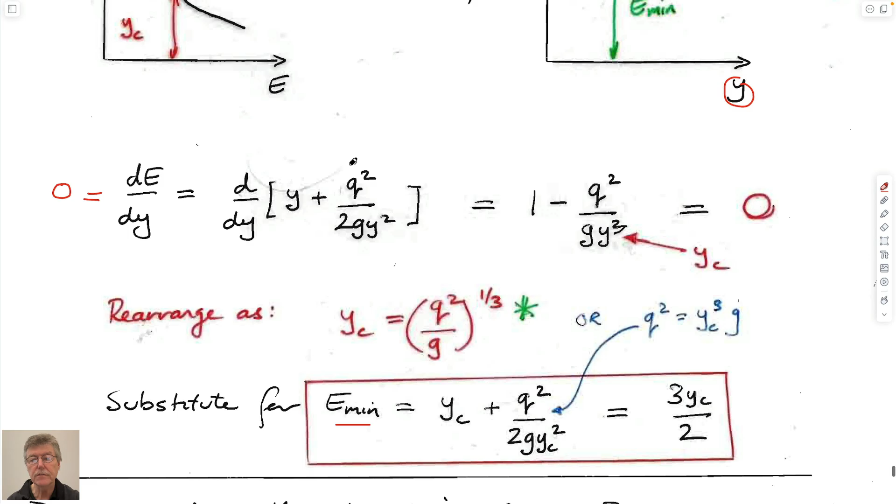If you take the derivative of this energy expression, the derivative of y with respect to y is equal to 1. The derivative of y to the minus 2 is y to the minus 3, and there's an extra 2 that gets rid of this 2. It turns out that we can work out that the minimum energy occurs at a critical depth, which is 2/3 of E min. So all it's saying is that the coordinates of this point are E min and critical depth, with the 3/2 relationship, right? Yeah, 3/2.

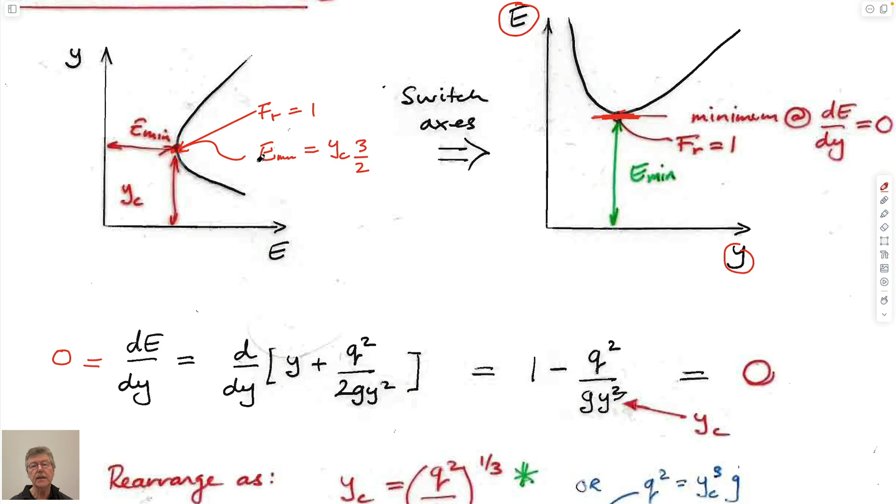So if you know what the minimum energy is, you can immediately calculate what that depth would be if you wanted to know that. Or likewise, if you knew what that critical depth was, you could calculate what the energy was. That's it. So I think there's an example in here that does exactly what we're talking about. I guess this is the same example that we just did. So you could imagine having a weir like this. You can calculate for a given value, if you assume the base of this thing is flat, which it is.

If you assume that we're not losing any energy in the system, then this whole term on the right-hand side goes to 0. You're just left with these terms. Continuity requires that Q1 and Q2 are the same. That's why we did that. It's the same as uppercase Q1 is also equal to lowercase q1. It's just that we've defined it now in terms of a flow multiplied by height, because that's useful to us, because we want to get that out of here.

And if we know that the energy upstream and downstream are the same, then if we go through and make any of these curves, just by choosing a value of q and calculating for a range of y's what the energy would be, we end up with these curves. Don't care about the stuff below here. And then we can use that, if we know what the energy is at a particular location, then we know that the upstream depth here is this depth, which is this depth here. And we know that the downstream depth is this.

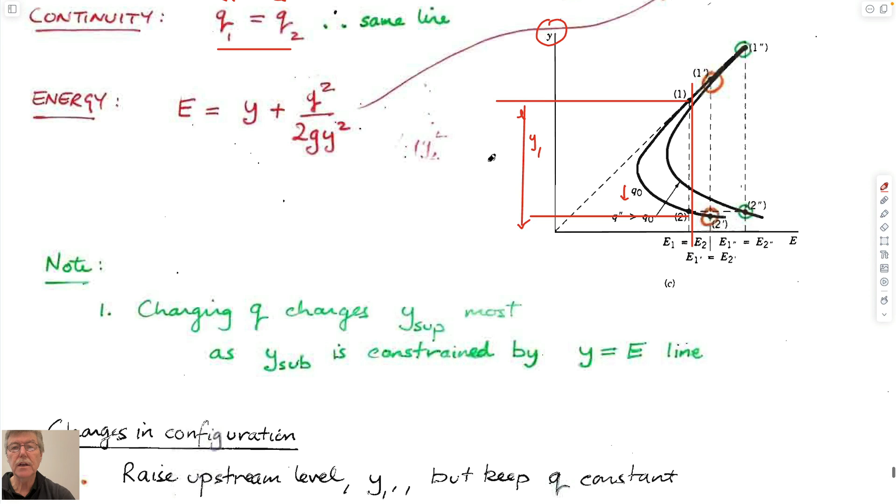And we can do some other things. We could have a different flow rate, change the flow rates. This would be a lower flow rate, and this would be a higher flow rate in here. And depending on those, we could calculate what the magnitudes of the depths would be. That's it. So I think that's all. Yeah. And we can do all kinds of fancy things. So maybe we'll recap on that next time, but that's the essence of gradually varying flows, I guess, and what we need.

So you just need to define things in terms of an energy equation. It ends up being no different than the energy equation, which is the Bernoulli equation with H sub L, driven by gravity, and we can define it in terms of those terms. So, okay. A useful thing for 9 days from now.

Straightforward test. Okay. So next time, I'm not sure we have a very long session. We'll talk about rapidly varying flows, which are hydraulic jumps, which are probably more involved than we need for this class. But anyway, we'll talk about it and close things out on Friday.